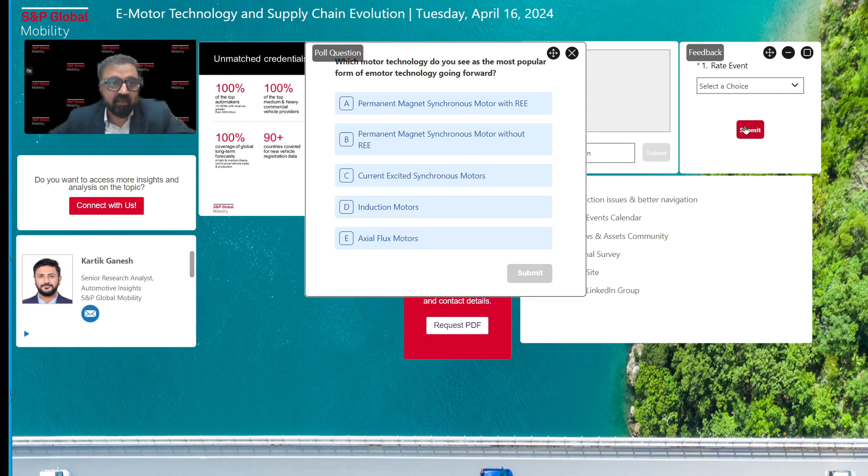So this is the answer we got. The audience believes that permanent magnet synchronous motor without rare earth elements, at 36.4%, is going to remain the most popular technology going forward. Then 31.8% is the permanent magnet synchronous motor with rare earth elements. Then axial flux motors with 18.2% and induction motors at 9.1%. So the audience expects that permanent magnet synchronous motors without rare earth elements are going to be the most popular form of e-motor technology going forward.

So then we move to the second question of the survey. Which winding technology would be the most widely adopted in the future? A, insertion round wire. B, concentric spool. C, hairpin U-pin. D, continuous hairpin. E, I-pin. I repeat the question: which winding technology would be the most widely adopted in the future? Please provide your answers. We are going to share the poll results in the next 20 seconds.

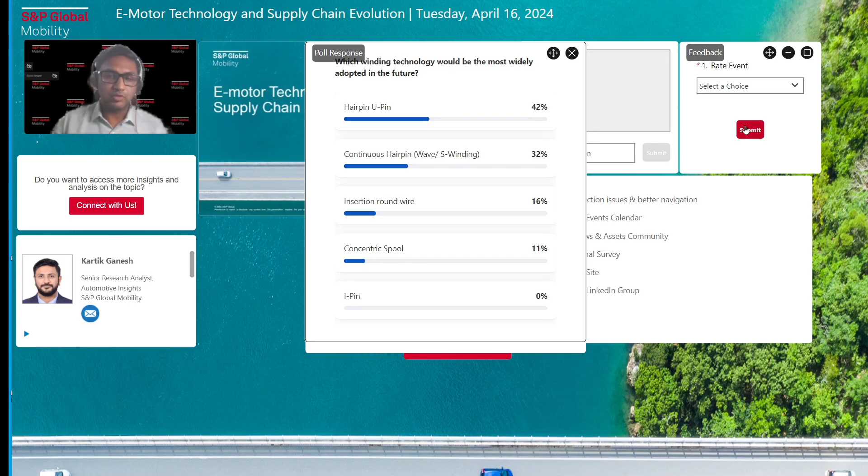So through the course of this presentation, my colleague Piyush and I would be talking about the technology and supply chain evolution that's coming about in this particular domain. Let me start off by touching upon the agenda for the session. We have three main sections. The first covers drive technologies. We'll look at certain key attributes driving changes in motor and subcomponent design, and understand certain unique use cases developing in the world of e-axles across different vehicle segments. In the second part, we'll look at critical materials, to understand the industry's perspective on the long-term viability of usage of certain critical materials.

We'll look into a couple of scenarios that indicate how we could potentially reduce the dependence on rare earth elements, have a quick look at how copper demand is likely to evolve over the decade, and then understand how investments in the world of e-motors are happening across the globe. The third and final section would look into the supply chain dynamics of the e-motor world. We'll dive into the hot debate about in-house versus outsourcing strategies for e-axle and some of its subcomponents, and finally summarize the presentation.

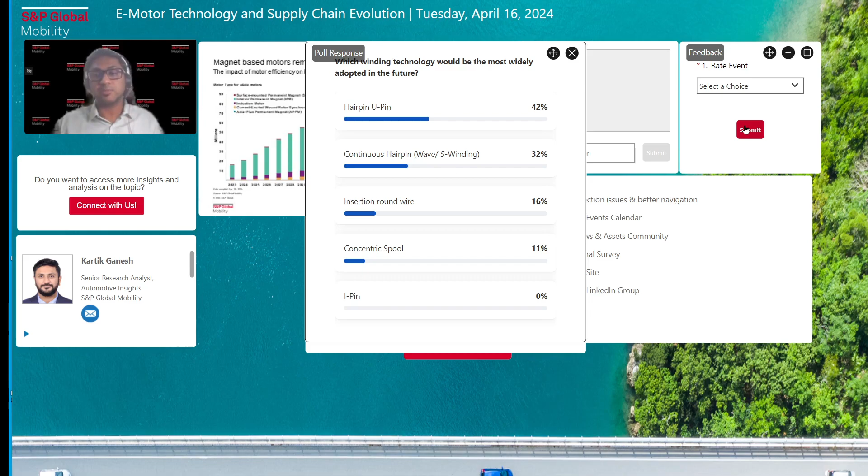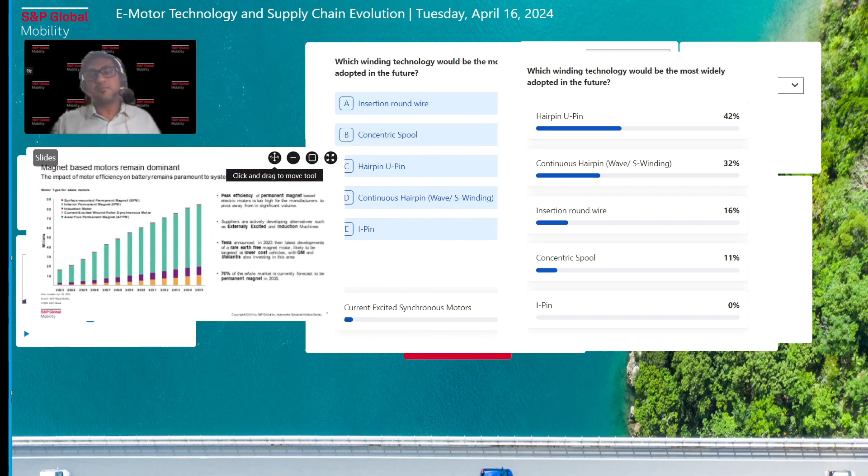Last year, Tesla announced that they would be developing rare earth-free permanent magnet motors, which are likely to be targeting low-cost variants. Similarly, in North America, General Motors and Stellantis have also invested heavily in this area to ensure they can develop rare earth-free motors. Now, if we look at the 2035 market, about 76% of the e-axle market is expected to be powered by permanent magnet-based motors only.

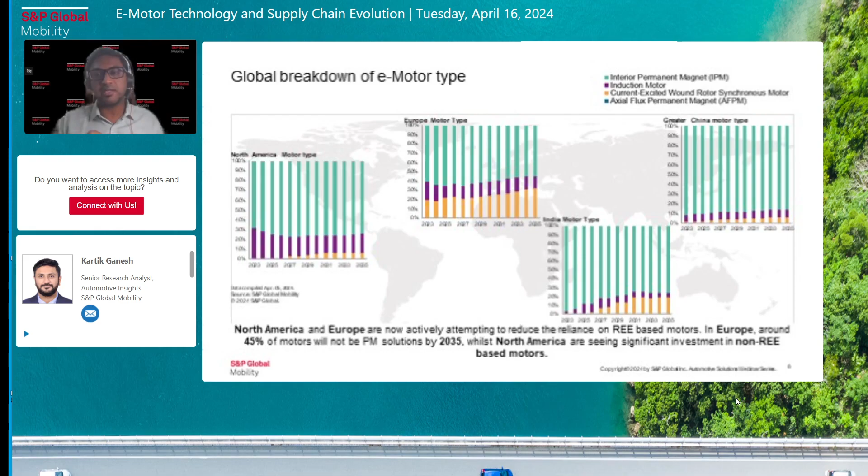Of the outlook, when we do a global look at it and break it down based on regions, we see a different understanding that comes to us. We see that different regions are likely to adopt different types of motors. If we look closely on the right-hand side, Greater China is expected to continue the usage of permanent magnets that use rare earth elements. This is driven by the fact that Greater China has access to an abundance of rare earth elements, which makes it a viable solution for them to pick up and go forward.

However, if we look on the middle and the left-hand side of the chart, Europe and North America are pivoting away from the PMSM motors with rare earth elements and are looking at alternate solutions that could help them. This is primarily driven by the fact that they want to reduce their dependence on certain raw materials which are regionally restricted, and thus Europe taking up more of electrically excited synchronous machines, and North America picking up permanent magnet motors which are rare earth free, and the use of induction motors.

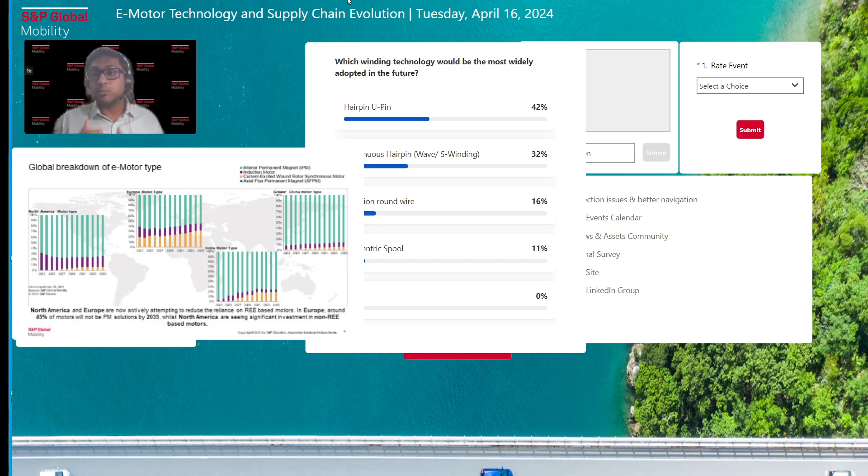Now, in the Indian market context, we believe that over time, as the uptake of EVs increases, India is likely to follow a mix of strategy that exists in North America and Europe, with certain segments being more popular in India. Rare earth-free permanent magnet motors are likely to attract a lot of attention in the market. So all this talk about permanent magnet motors leads us to one question: why permanent magnet motors? So it's actually important for us to assess and understand that these motors hold certain advantages, which is why they are called the go-to motors in the EV space.

So if you see the spider chart on the left-hand side, four most common motor topologies are taken into consideration with about 5 critical attributes which are considered thoroughly before evaluating which motor to go ahead with. PMSM motors score highly on 4 attributes out of 5, except for the cost advantage part, and thus are taken forward in the industry. So typically, a permanent magnet motor offers much higher efficiency due to the use of permanent magnets, unlike other motor types. This permanent magnet produces a stronger magnetic field and ensures a higher power density.

And since this type of motor is not dependent on external sources for excitation, unlike some of the other motors we have taken here for comparison, this further leads to better energy conversion and a longer range, which is a direct effect of the superior efficiency they possess. Over the past decade, there has been a significant amount of development and improvements that have come about, which ensure there is an increase in the performance, the durability, and reliability of permanent magnet motors.

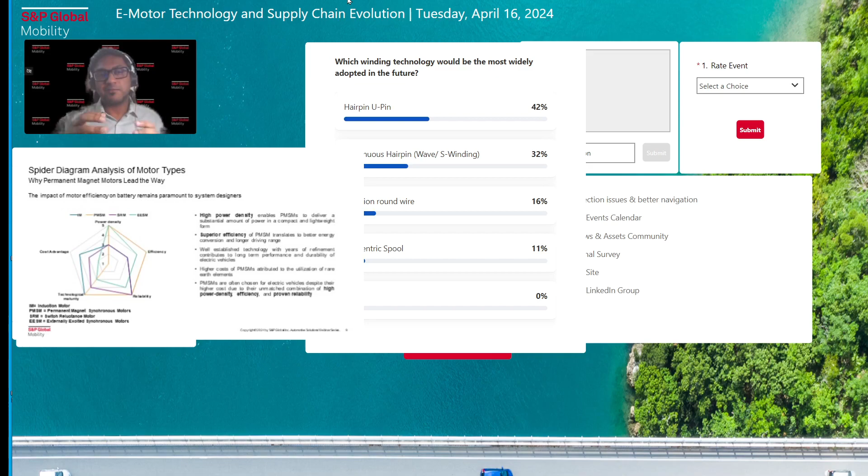The relatively high cost of these motors is attributed to the fact that they make use of rare earth elements, although used in lower quantities, but are still on the expensive side. This unmatched combination of power density, efficiency, and proven reliability makes permanent magnet motors the go-to solution for suppliers and manufacturers in the EV space.

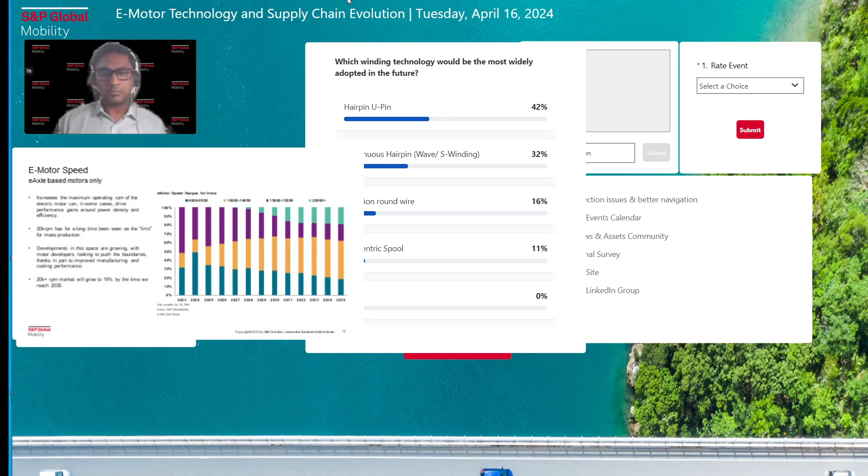Piyush, can you call Karthik on this? Well, he's already here. There was some issue with the browser and it crashed. Yeah, Karthik, I think you're back. I hope I'm audible now. Yes. Your connection looks slow to us. You're audible. You can switch off your camera and you can speak. Sure, no problem. Yeah, we can hear you now. Perfect. All right.

Okay. So, as we were talking about some parameters that influence performance of electric motors, one parameter that has been looked at in detail nowadays is the speed of the motor. Designers are trying to explore how increasing the maximum speed of an electric motor could drive certain gains towards power density and efficiency. For a long period of time, 20,000 RPM has been seen as a limit within the industry when it comes to mass manufacturing of electric motors. Recent developments have helped push this limit as high as 30,000 RPM, thanks to better thermal management and improvements in mechanical design. In the India market, by 2035, we expect 19% of the e-motor market to be powered by motors that can run at speeds greater than 20,000 RPM.

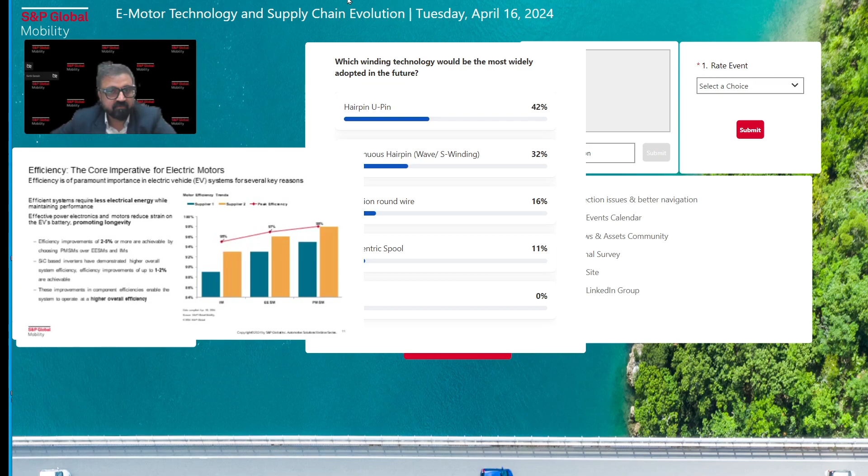PMSMs can easily achieve efficiency levels from 94 to 98%, while EESMs and induction motors have a wide band, from 89% to 96%. These values are heavily dependent on design, operating conditions, and control strategies. Moving from induction motors and externally excited motors to permanent magnet motors can achieve an improvement of about 2 to 5%. In parallel, silicon carbide based inverters can yield significant improvements, enabling higher system efficiency. The idea is to optimize such subcomponents so that the overall system efficiency is higher.

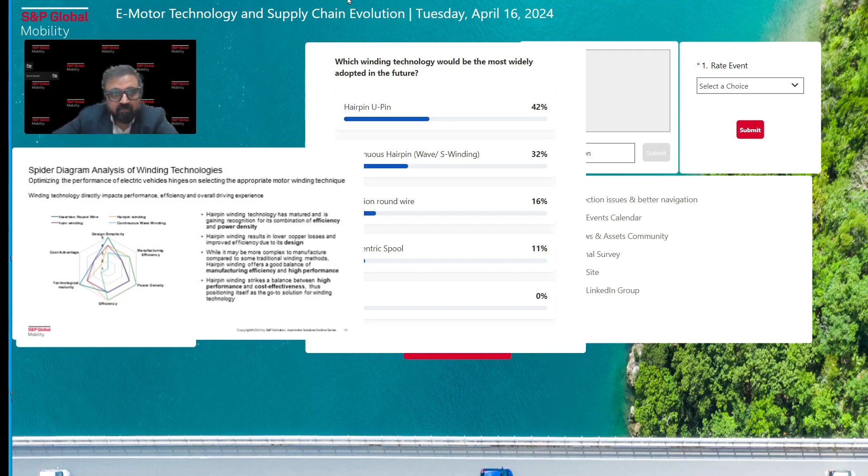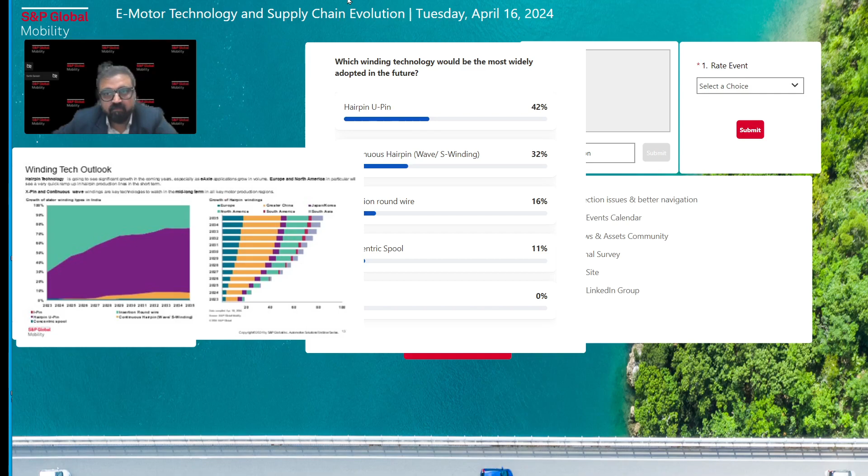E-beam is basically an adaptation of e-axle for a more robust use case where it has a similar offering as that of a solid beam axle used on an internal combustion engine vehicle with a motor packaged into the axle itself. Due to the unique loading and towing requirements, this technology is considered as a practical solution for pickups and vans and is also viewed as a faster and a more affordable way for electrification to ramp up in these two particular segments.

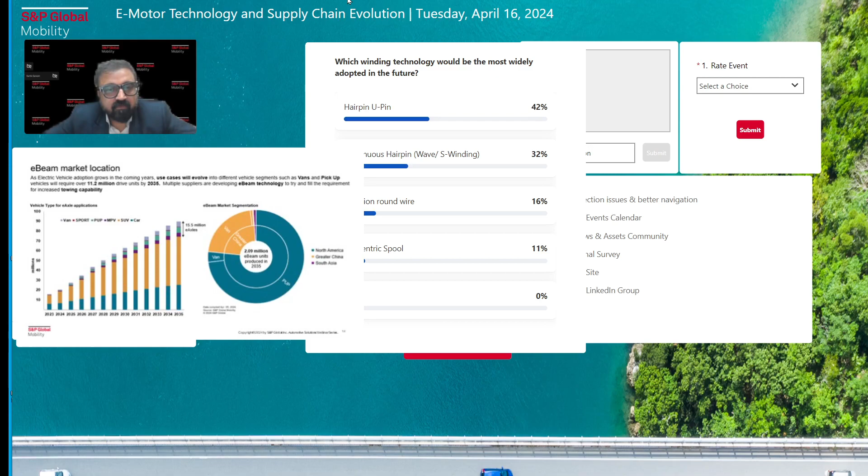A great example of this transition in supply chain is a phenomenon called nearshoring, where suppliers have shifted their base from different parts of the world to the North American region so that they can categorically cater to the North American market. So through shifting of these bases to North America, these suppliers and OEMs are able to secure their supply chains in the event of a regional crisis. We expect India to follow a similar trend to meet the needs of the EV industry in the coming decade. And by the end of the current decade, we expect about 500,000 motor units to be produced in India.

As more and more announcements come into play, we expect more plants to be set up, more localization to occur, and a significant amount of volume to increase as we go forward.

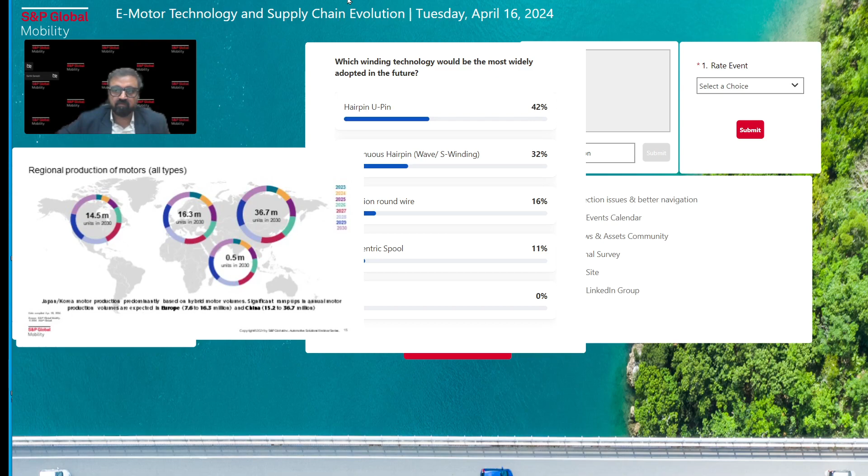I would like to now hand over to my colleague Piyush, who will take you through the parts on critical materials and provide an outlook on supply chain. Over to you, Piyush. Thanks, Karthik. Thank you everyone for joining in here. So my name is Piyush and I'll be taking you forward towards the critical raw materials and the supply chain aspects of the propulsion technology.

So starting with this one, first, when we talk about the concern in this industry, we know that one of the primary concerns in the industry revolves around the possibility of facing supply chain constraints of rare earth material. The reliance on these materials for various technologies raises questions about long-term availability and sustainability.

So notably, there is a discernible shift away from rare earth dependency in the technology, and major players like Tesla and BMW are spearheading this shift, prioritizing alternative technologies to reduce the reliance on rare earth materials. For instance, they have made significant strides in incorporating induction and externally excited motors. And one of the notable developments that happened recently was a Tesla announcement in 2023 regarding the development of non-rare earth-based magnets as well. This innovation marks a significant step toward mitigating the concerns in long-term availability.

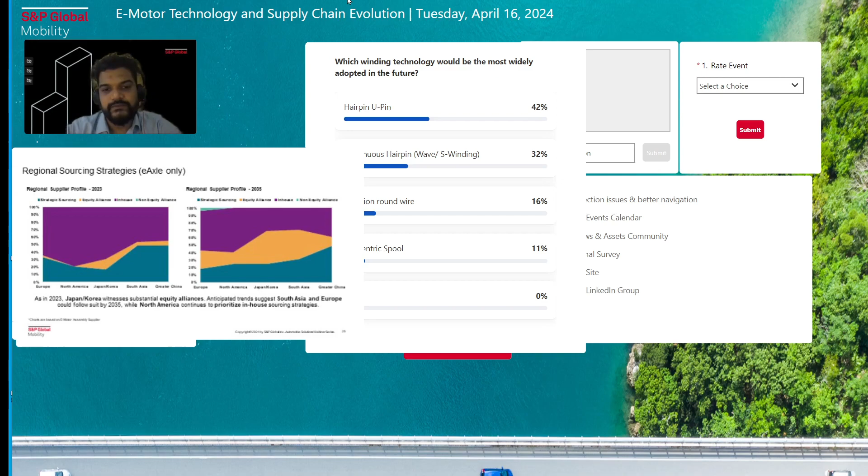So in conclusion, regional sourcing strategies for the e-axle reflect a dynamic interplay of market forces and how a particular region looks at technological aspects and strategic imperatives. In this slide, similar to the previous e-motor one, we are trying to explore the strategic considerations regarding in-house production versus outsourcing of the key subcomponents of the e-axle, like rotors and stators.

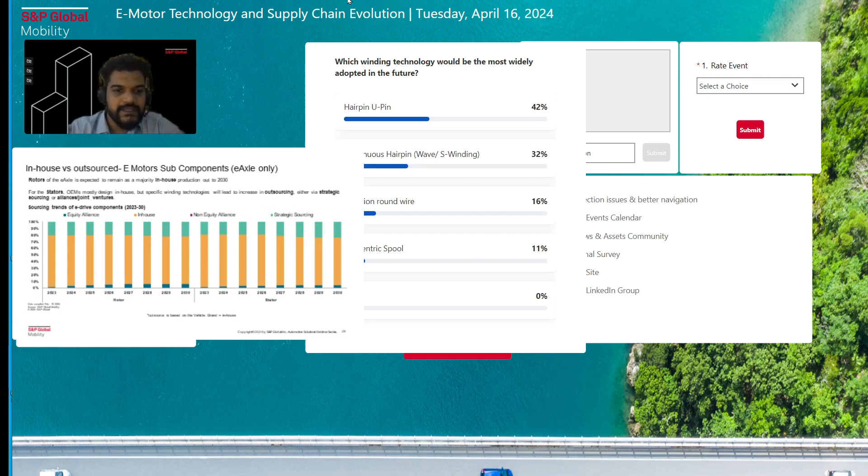Particularly for rotor production, the production of rotors for e-axle motors is expected to remain predominantly in-house out to 2030, likely due to the preference for maintaining control over critical components, ensuring quality, performance and intellectual property protection. Similarly, for stator design, OEMs typically design stators in-house, emphasizing customization and alignment with specific performance requirements.

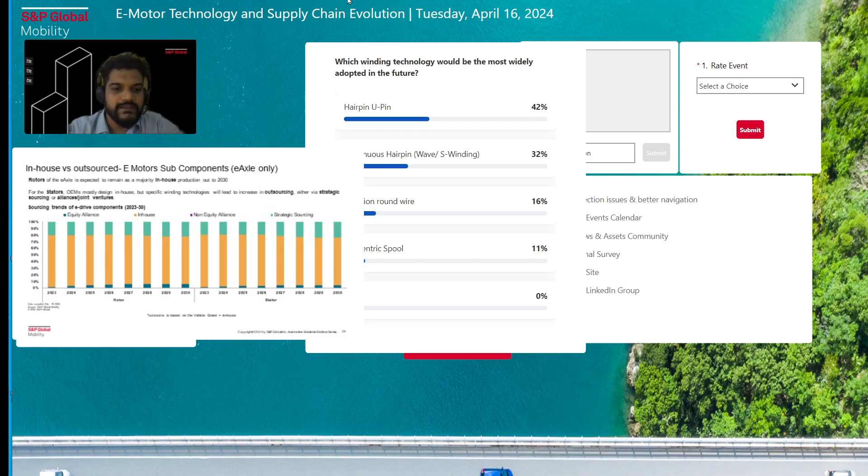However, the increasing complexity of winding technologies might lead to a rise in outsourcing, specifically for hairpin winding and continuous wave windings. As a result, OEMs are increasingly turning to strategic sourcing and alliances or joint ventures to outsource rotor and stator production while retaining control over their design and IPs.